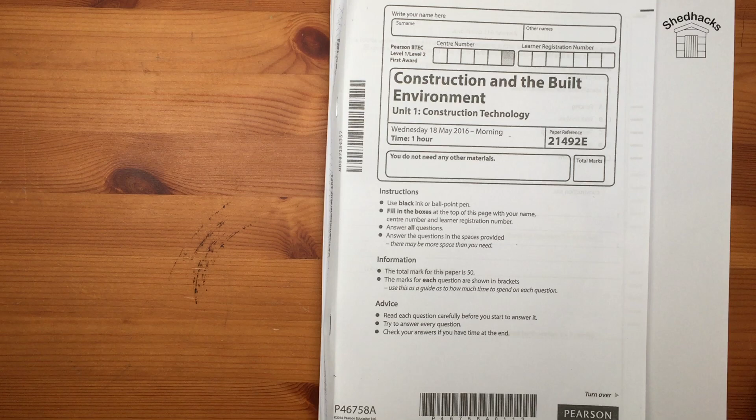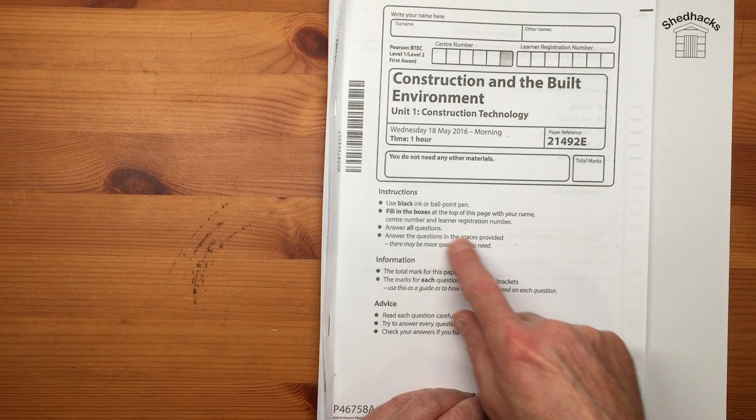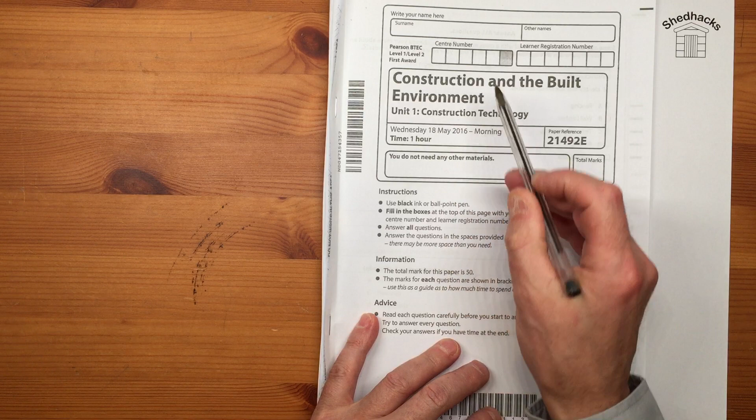Hi guys, this is Construction Technology Unit 1 and it was a couple of years ago, 18th of May 2016. This is the 50 mark paper. I think they've got to 60 marks now, and it's about an hour, but your paper will be about an hour and a half roughly. But this is a really good piece of revision for you. Don't forget it's for Unit 1 Construction Technology, and it's level 1 and 2, okay?

Brilliant. Okay, so first question. Pre-construction activities have to be completed before work can begin on site, and it says identify 2 site setup activities. Don't forget you must use a ballpoint pen. Let's go back to the question. 2 site setup activities. Okay, so setup is fencing. Wall finish is not appropriate. Temporary lighting, yes. Roofing, definitely not. And foundations, that's easy. This pen's not great, but good job.

Name 2 services that may need to be protected before work can begin on site. Things that you need to protect, well, electrical and gas. Okay, now I'm doing this very quickly. You may write a sentence in there if you want to. Give the purpose of a slump test.

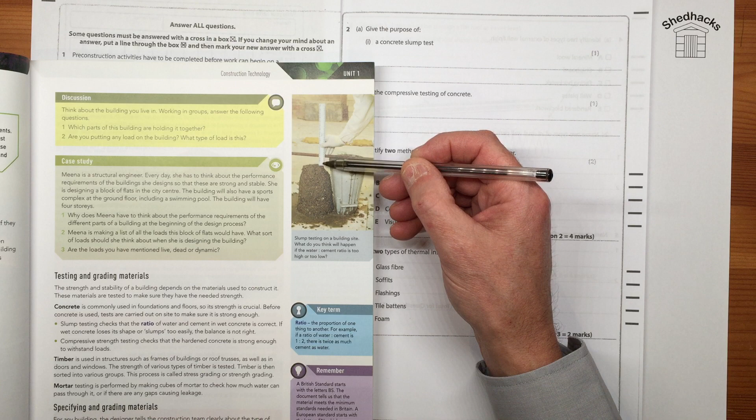A slump test, as shown here, is to establish the workability of a concrete ratio, the cement to water ratio with the aggregate and sand. Very important. The more it falls, the more workable the material is. But it mustn't collapse too much when you've taken it out of the cone. That cone would have been the other way around. It would have been filled up with the wet concrete, or even mortar in some cases, depending on what you're testing. The amount it drops from the top of the cone gives you a ratio, and that ratio gives you an idea of how workable the concrete is.

And it mustn't drop too much, because it means the concrete has too much water in it and is potentially weakened by too much water. So concrete slump test purpose, to establish workability. Okay, the compressive test of concrete, the purpose of it, to establish

compressive. Oh, my pen's gone. Compressive strength. Okay. Yeah, the compressive test of concrete is to establish the compressive strength. Yeah, I think it would be something like that. Hard on that one.

Identify 2 methods of stress grading structural timber: machine grading, and compressive. Yeah, okay, stress grading timber. You can actually visually see how a timber is. If it's got too many knots in it, obviously that shows weakness, but these are the most appropriate ones. I'm a bit unsure about that answer, but compressive is about the crushing strength of concrete. So yeah, it's the compressive strength. I think that is the right one.

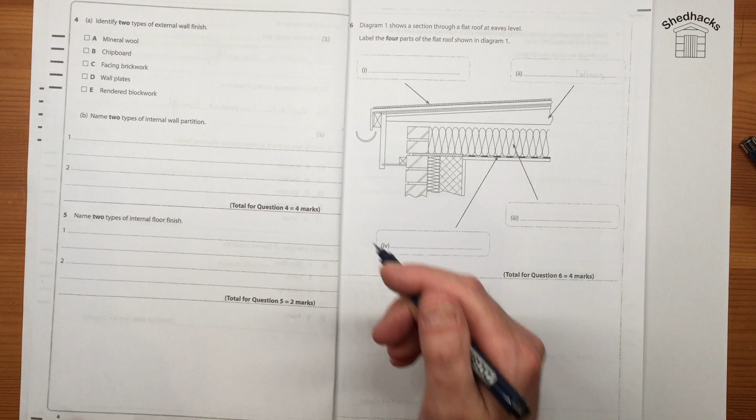Identify 2 types of thermal insulation: glass fibre and foam. Those are the common ones that you see. Nothing to do with soffits, flashings or tile battens. Okay, brilliant. Question 4. Identify 2 types of external wall finish. External wall finish would be, in this case, rendering and facing brickwork. Wall plates, nothing to do with it. Chipboard and mineral wool, nothing to do with it. Name 2 types of internal wall partition.

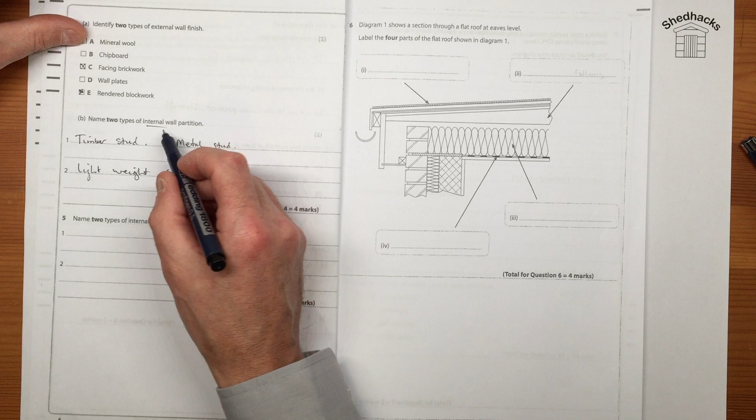Internal wall, so you've got timber stud, and you can have metal stud. I'm going to put that in. Metal stud work. And you can have lightweight concrete block. Internal walls are not normally load bearing, but the partitions can be load bearing. It could even be concrete, brickwork, or a heavier concrete block. But these are what I think it's really referring to.

Name 2 types of internal floor finish: tiles, chipboard. Those are some. Carpet isn't really a finish, but you could say tiles possibly and carpet on top. You could even use laminate.

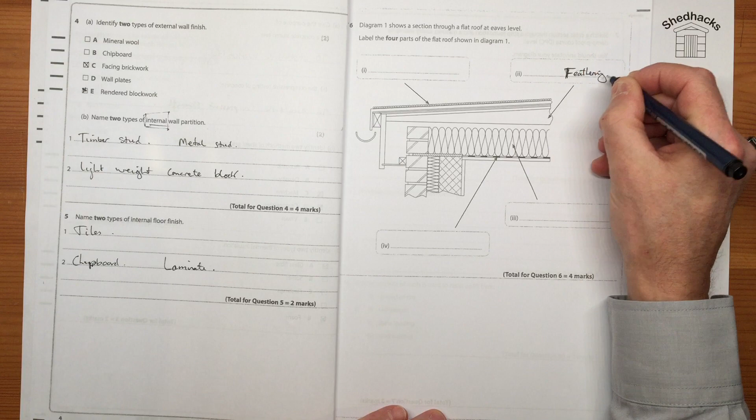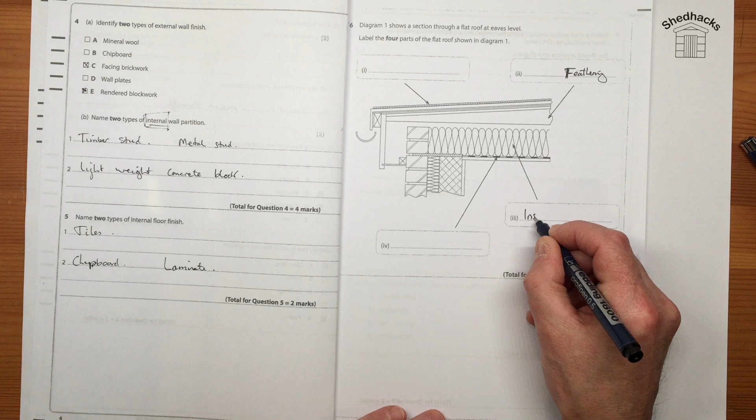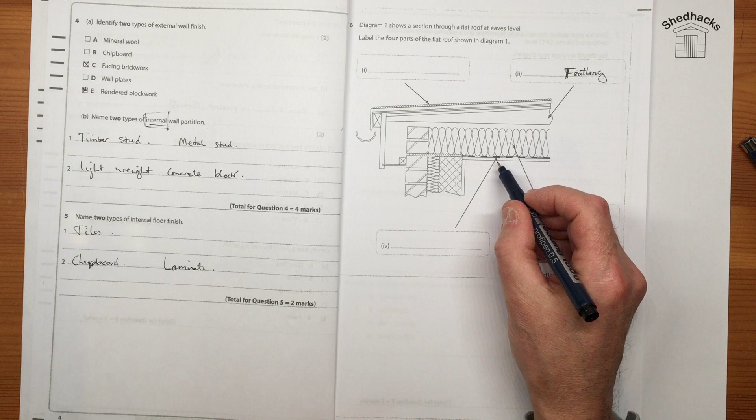Okay, right. Number 6. The diagram shows a section through a flat roof at the eaves, the edge. Label 4 parts of the flat roof. I've tried to find this in a lot of textbooks, and it's not commonly shown, but this is the firring. That allows the slight slope of the roof for water runoff, about 2 or 3 degrees. Insulation between the joists. The joists run in that direction, sitting on the blockwork wall, and in between the joists it's got the insulation.

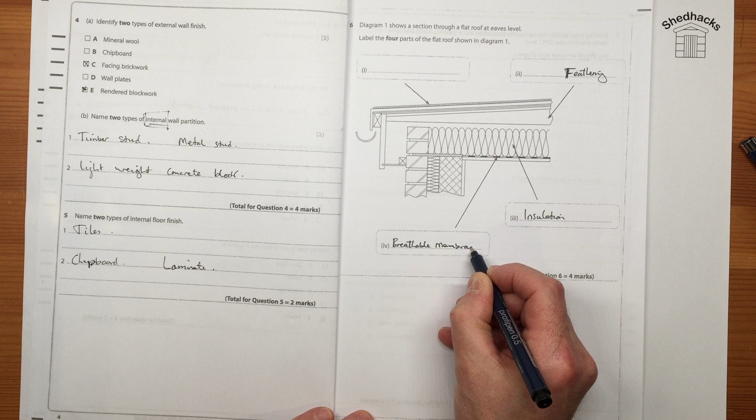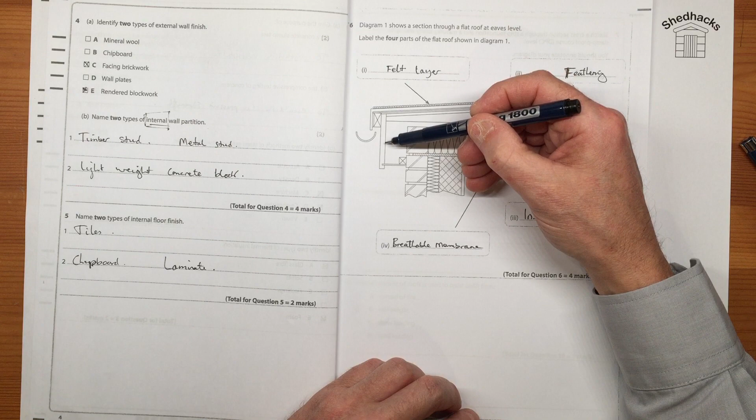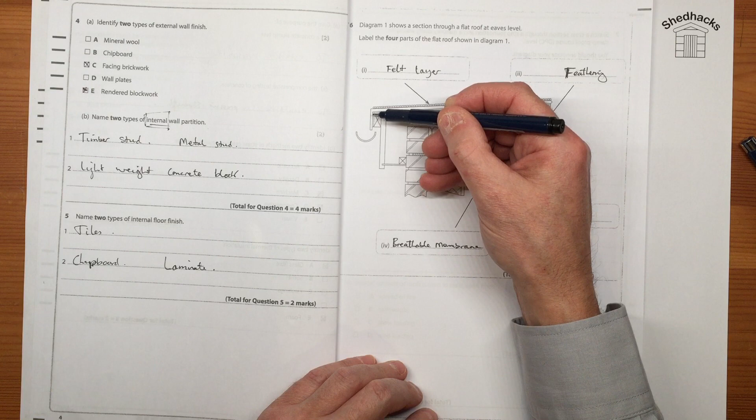Breathable membrane, the dot dash line, and this looks like the felt deck, felt layer. I think that's what it is. It shows the blockwork, the insulation in the cavity closer here. It doesn't show a wall plate. There'll be a wall plate that the joists sit on, then the soffit support, fascia, a membrane here, guttering, and then a down piece for the felt, which sits on this section of wood. It's like a mini fascia almost. Right.

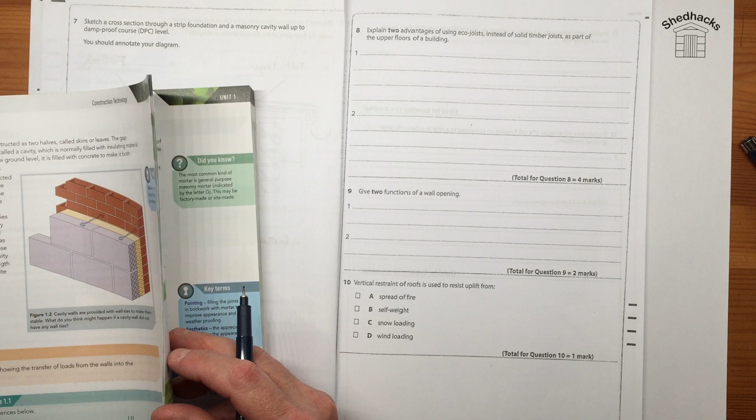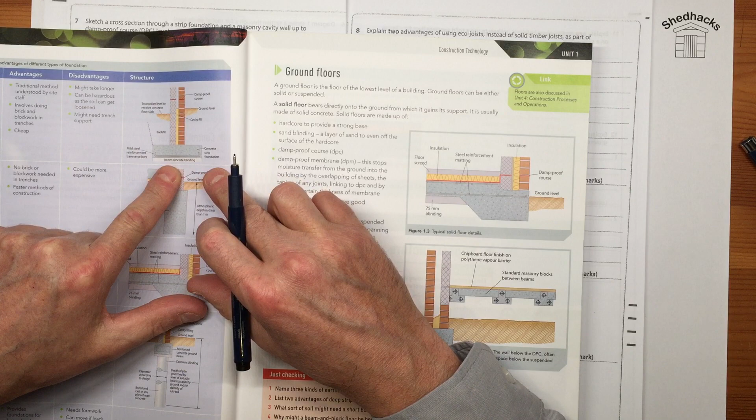Cross sections for a strip foundation. Right, let's just have a look at strip foundations quickly in our textbook. Now, it's important we get this right, and the reason I'm showing you this. Oh dear, Unit 1, can't find it, chaps and chapesses. Strip foundation. Right, where's it gone? Where's my strip foundation? Here we go. Strip foundation is that. Okay, there. So you can stop the video at that point and just remember that.

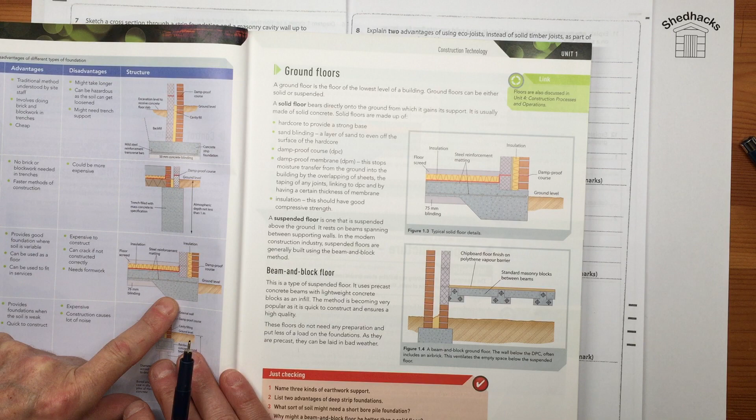Okay. There's a deep strip foundation. Can you get that? So strip foundation, deep strip foundation, raft, and a pile. So I'm going to move that book there. This is the BTEC Level 2 book, textbook. Very good. And that's page 22. So have a look at those. Okay. Stop the video there and revise those.

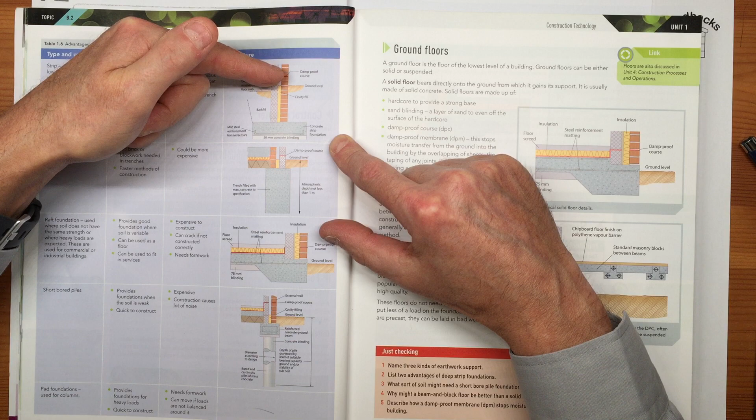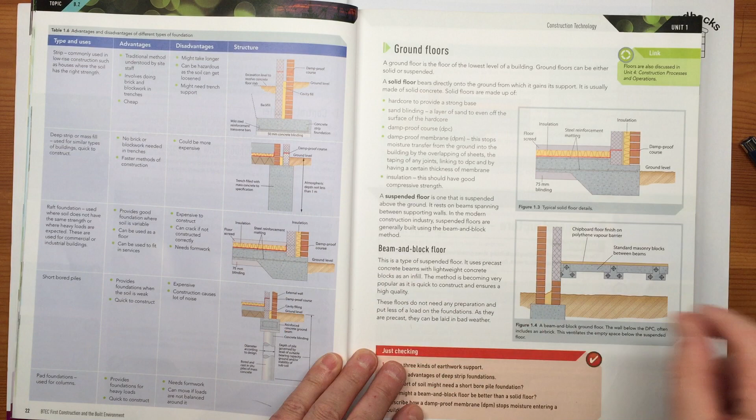And know that you've got the brickwork cavity fill. Cavity fill is below ground level and usually up to about 100 mil into the cavity before it gets to the damp-proof course there. But they all must have a damp-proof course. Usually 150 millimeters high from the ground. And it stops the splashback of the water and then the water travelling up the wall.

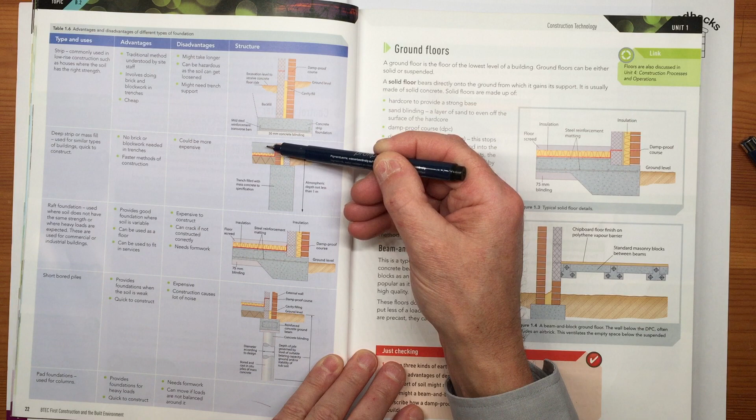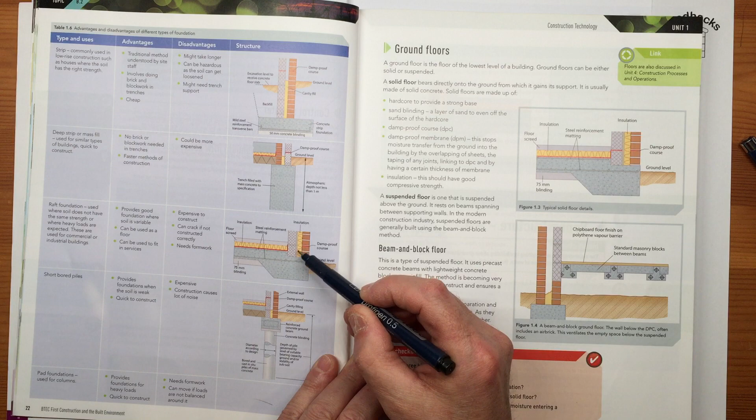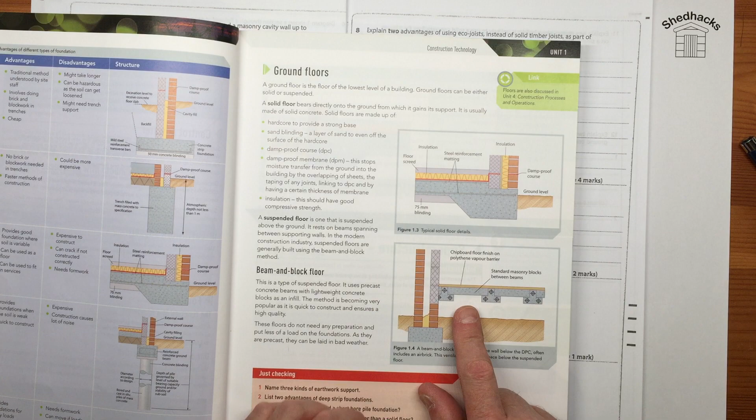Okay, and then of course in this one, which shows a solid floor, it shows the membrane under the floor and the insulation, and then the concrete on top forming the floor. Okay, and the raft. Good thing about the raft, it forms the floor at the same time, doesn't it? Insulation coming down, it should ideally stop just before the DPC, but anyway. And then the cavity fill is below that. Okay. Right. There's your brick, beam and block here, sorry. Right, brilliant. I hope that's helpful for that question.

Explain 2 advantages of eco joists. Eco joists, they use sustainable timber. Explain 2 advantages of using eco joists instead of using solid. They can be much lighter in weight, because you use sustainable timber.

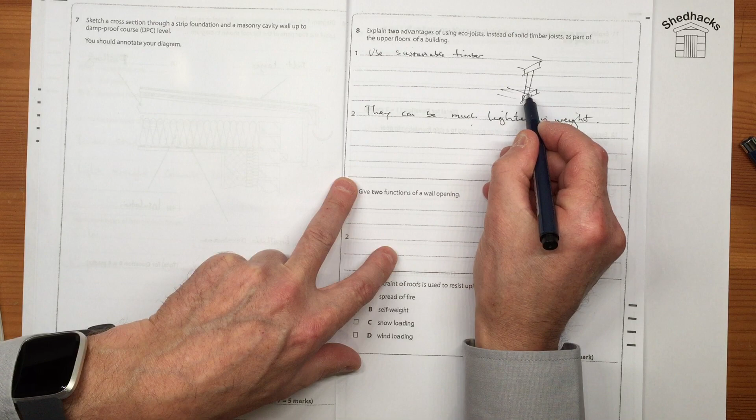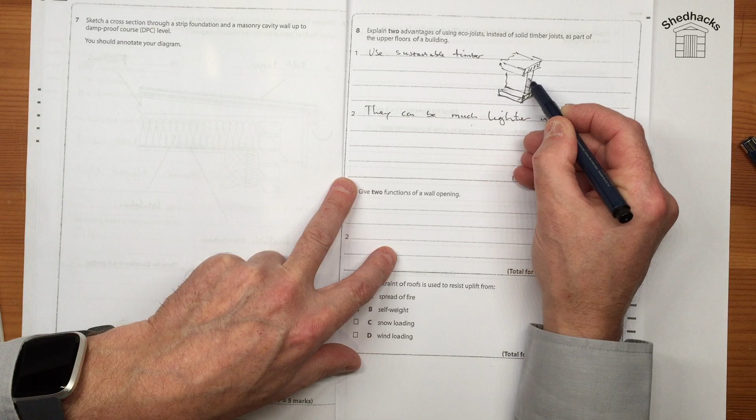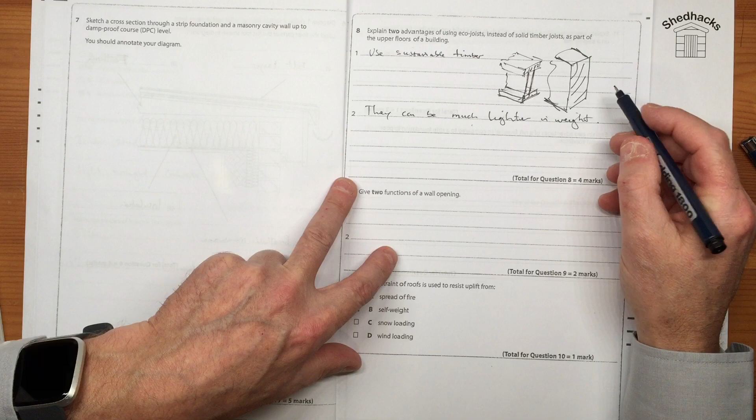If you look at it in a section, I'm going to draw a quick view. You've got 2 pieces of often man-made, or it could even be solid wood, the ends, and then they're connected with a man-made piece in the middle. So there's your 2 sections of wood, and then they're connected with this piece in between. And it actually makes the whole thing much lighter. And you can even cut holes in it if you want. And it's better than the equivalent, an enormous chunk of timber, which is extremely heavy and expensive. Sorry about my sketching, guys, but you can see the advantage of one over another, can't you? And this piece here could be made from plywood. Yeah, brilliant.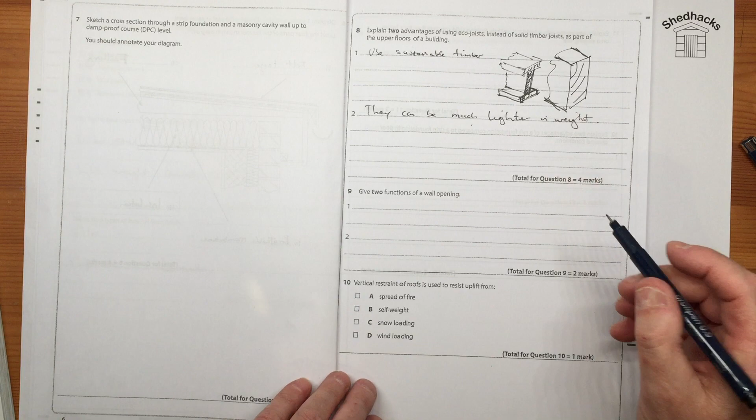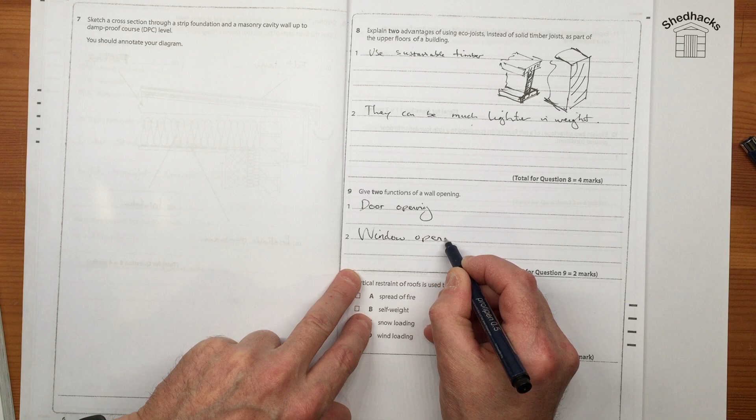Right, okay, give 2 functions of a wall opening. Well, to provide an opening for a door. Window. Okay, could be for the pipework running under the wall, perhaps at ground level or just below. Okay.

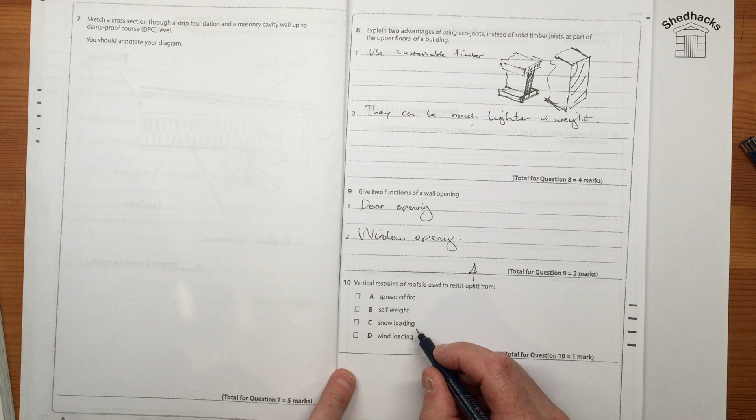Vertical restraints of a roof are used to resist uplift. That's the pulling up, and what would cause a roof to be pulled upwards? Well, possibly fire, but I doubt it. Certainly not its self-weight, that would pull it down. Snow, that would pull it down. Wind would pull it up. There you go, wind.

Let's go on. Question 11: explain 1 reason why a builder is unlikely to use a solid ground floor for a house on a sloping site. Very expensive to start with. So we've got a sloping site, you're building your house. There's our house. With a solid ground floor, firstly, you'd have to have an enormous amount of concrete to fill that, to get it level. Plus, you've still got to have your foundations. So you'd have an enormous amount of concrete here, and possibly 2 different levels of foundation. Yeah? So expensive. Okay?

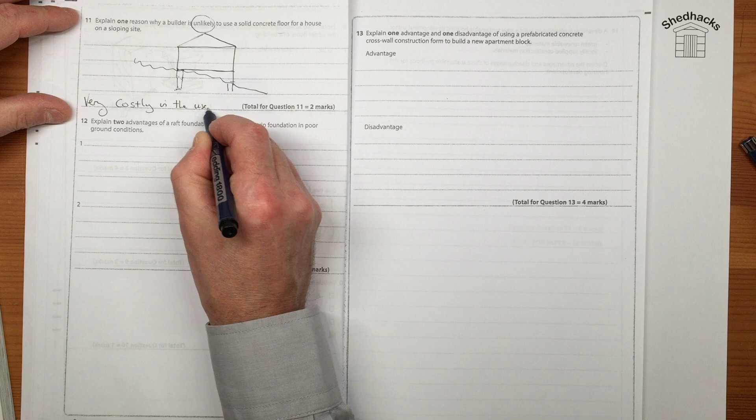Why a builder is unlikely to use a solid concrete ground floor: very costly in the use of concrete. Okay, that would be the main reason, I'd imagine. Here's your concrete. You'd have to come right across there to form it. Okay, we'll go with that one.

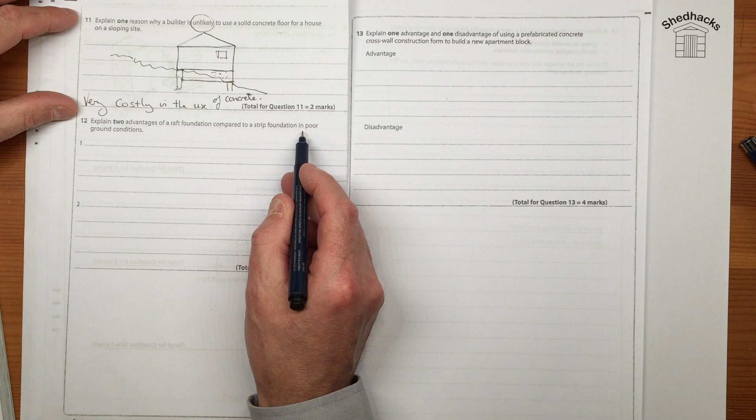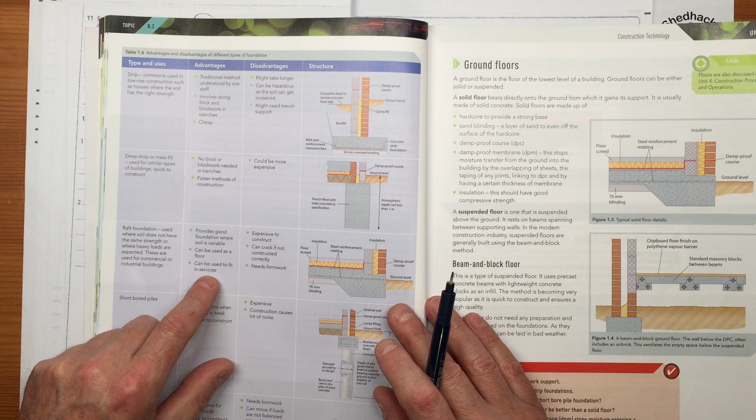Explain 2 advantages of a raft foundation compared to a strip foundation. A raft over a strip, 2 advantages. Okay. Well, there you go, they're the answers. Raft foundation advantages: provides good foundations where soil is variable. Can be used as a floor. Can be used to fit in services like water pipes and gas pipes. Okay. Right. So you've got the answers to those.

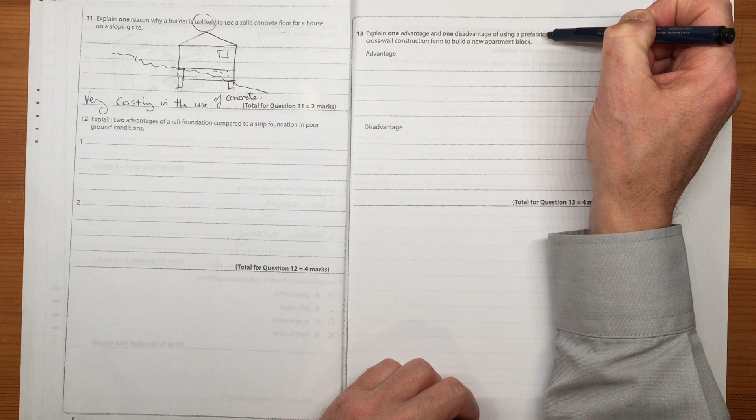Explain 1 advantage and 1 disadvantage of using a prefabricated concrete wall construction. Prefabricated: made before, installed on site. Okay, so it could be doors, windows, staircases, all those sort of things. Trying to think of something else, but they're the obvious ones. Oh, roof truss.

Roof trusses. The advantage: improved quality control, less wastage on site. Disadvantage: has to be ordered.

To exact... has to be ordered to exact sizes. You can't add bits on when you get the window in, because you've made the opening too big, or too small, whatever it might be. A disadvantage: can it be more? Let's just think. A disadvantage of it being pre-made. I can't really think of a disadvantage of being pre-made.

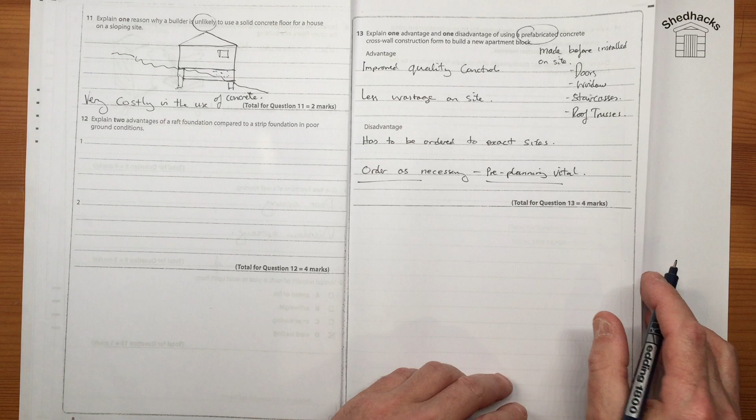Okay, moving on. A developer is planning to build a new sustainable housing development using green renewable materials and locally supplied. Discuss the advantages and disadvantages of these sustainable methods for housing. Now this is a large question. This is the last one. So let's just do some bullet points, and I'll see if I can help you on this one. I'm trying to look in the book for something about sustainability.

Sustainability is all about those products, materials, that when used don't cause long-term damage to the planet or the earth, you know. So discuss the advantages and disadvantages of sustainable methods. Green renewable materials. Well, here's some good points. Green materials. Let's have a think. Materials. And I'm going to put this down. But in your question, you're going to discuss these points. You could use straw.

Softwoods. And they're fast growing. That's why. Oh, fast growing. Sorry about that. It's not a T. Fast growing. Okay. Straw bales, yeah. Or thatched. A thatched roof is straw, isn't it? Of course. But you can do straw bales. I've even seen straw bricks.

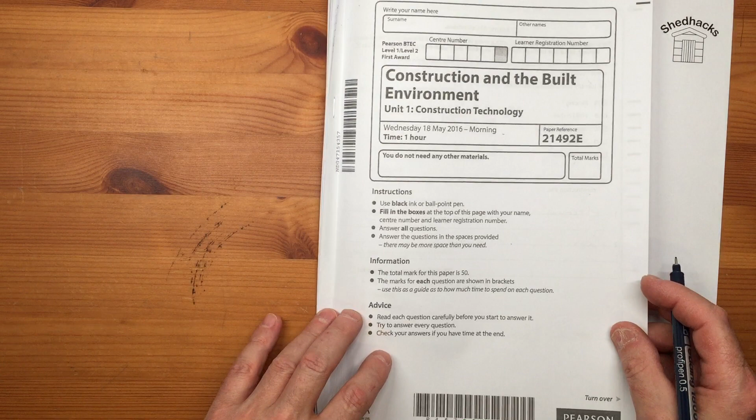I hope you found that useful. Please use your textbook as you go through. Okay. Good luck with the exam.